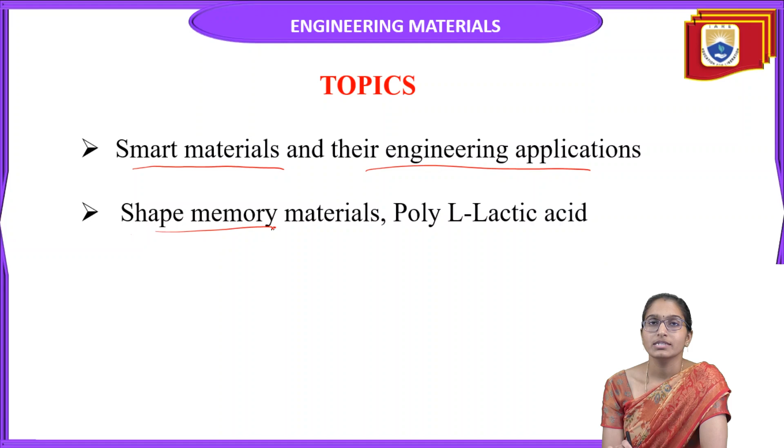Today I'm going to talk about the topic smart materials and their engineering applications. Coming to the topics, we will talk about smart materials and their engineering applications, and there are some other alloys called shape memory materials and poly L-lactic acid.

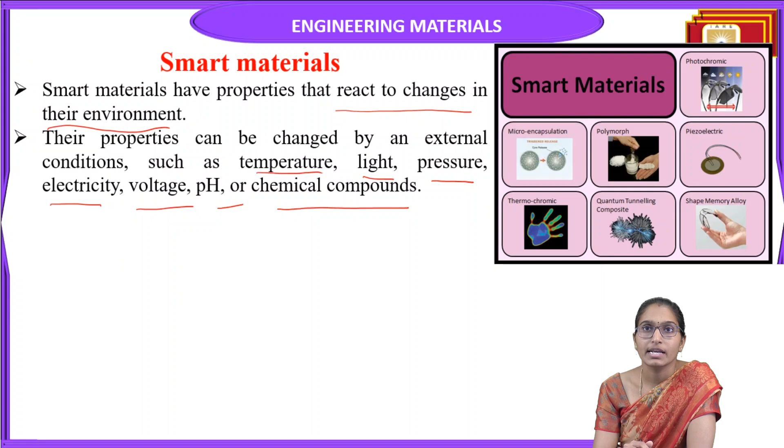Coming to the smart materials, what are smart materials? Smart materials have properties that react to the change in the environment. Their properties can be changed by external conditions such as temperature, light, pressure, electricity, voltage, pH, and chemical compounds. So then they can change their properties when they react to such conditions.

So these changes, why they are called smart materials, is because the changes whatever happens due to the external stimuli can be reversible. They can be changed and can be repeated many times. So this is the most advantage of smart materials, which cannot be carried out, meaning the changes cannot be reversible with other materials. Hence they are called smart materials.

These materials play a crucial role in various engineering applications and other fields. Here you can see different kinds of smart materials, like photochromic spectacles and foldable photo frames, piezoelectric bodies, and quantum tunneling composites.

And these are thermochromic materials that you have in X-ray, and this is micro encapsulation. That means you encapsulate the material that can be formed as a capsule and release some amount of the particle which you are loading inside them whenever they are needed. This can be used mainly for drug deliveries.

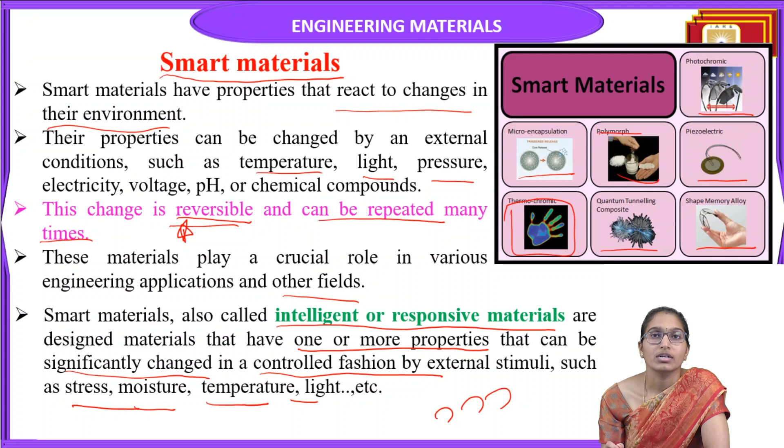The smart materials are also called intelligent or responsive materials. These are designed materials that have one or more properties that can be significantly changed in a controlled fashion by external stimuli such as stress, moisture, temperature, light. These can be tuned in a significant change in a controlled fashion, one after the other, based on the requirement. So based on that, one or the other properties can be adapted into the material, or we can have different ways of tuning the material so as to get the requirement.

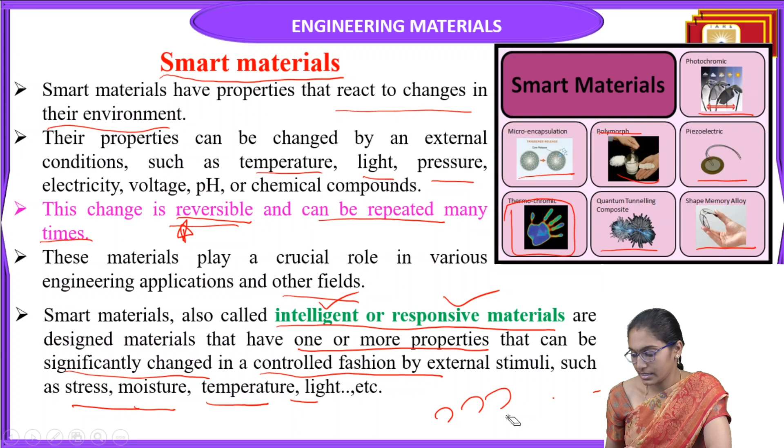Hence they are known as intelligent or responsive materials. So let us see what are the classifications of smart materials.

There are different types of materials known as smart materials, which are gaining high importance in the industry, so that they can be replaced by the regularly used metals or alloys or plastics or different types of metals, which can absolutely be replaced by these materials, and they can be very widely used.

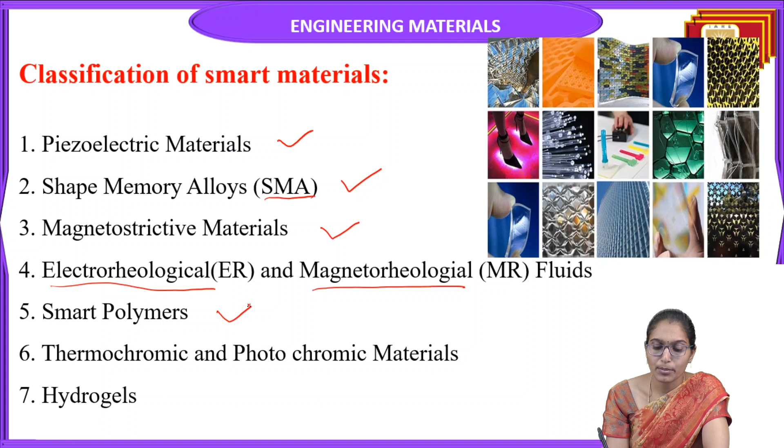One of the different types of smart materials is piezoelectric materials, shape memory alloys known as SMA. Next is magnetostrictive materials, then electrorheological and magnetorheological fluids, smart polymers, thermochromic and photochromic materials, and hydrogels. So these are seven types of classification of the materials.

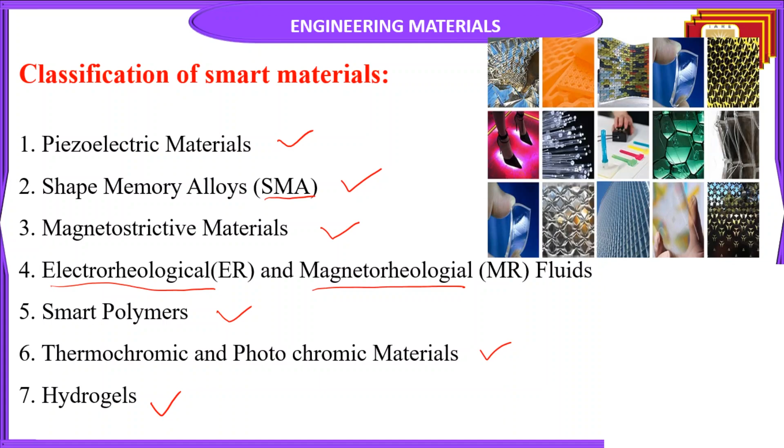Based on their properties, these are classified. Coming to the first type, that is the piezoelectric material. The word piezo means that which will produce electricity. So piezoelectrics are nothing but materials that can produce electrical energy upon application of mechanical stress.

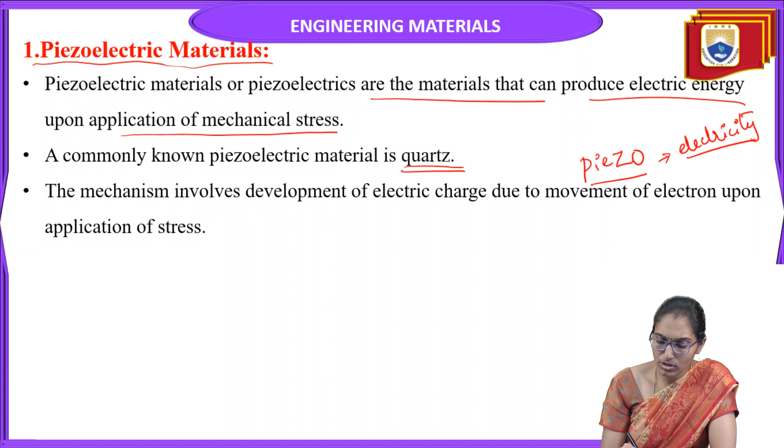The commonly known piezoelectric material is quartz. All of you know quartz very well, but it is a piezoelectric material. The mechanism of how this material acts involves the development of electrical charge due to the movement of the electron upon application of stress. Piezoelectricity was discovered in the 1880s by the Curie brothers in quartz crystals.

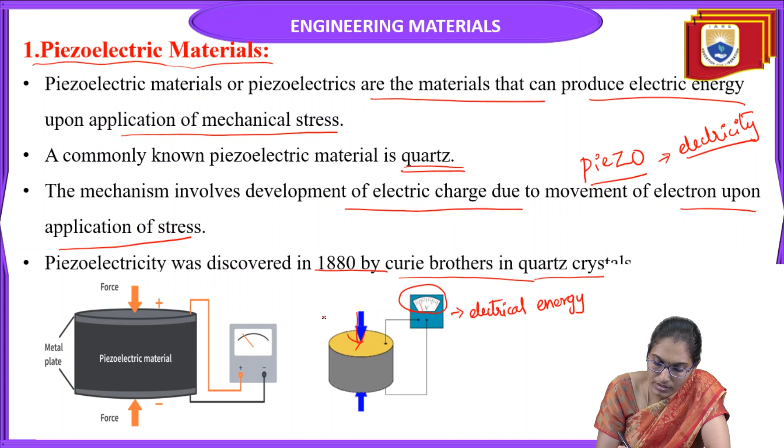Okay, this one is mechanical stress. And here you have another film picture. So the force is applied in this, in order to give the stress on the metal substrate, the metallic plate. This is a piezoelectric material which is producing electricity here.

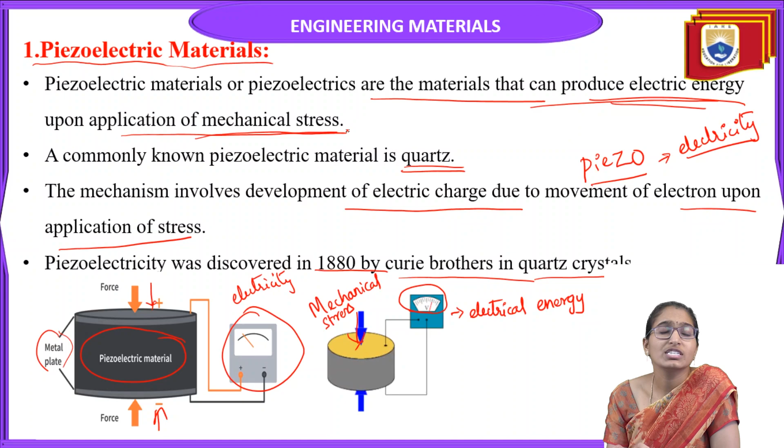And so this is the piezoelectric material. So piezoelectric material is nothing but the material that produces electrical energy upon application of mechanical stress. So do you know what is a real, generally used example of the piezoelectric material? Let us see what is that. So this is the piezoelectric material.

So when you apply stress here, what is happening? The piezoelectric element is attached here. It is a regularly used lighter. It has a piezoelectric element in this, and when you apply a stress over this, the electricity is generated because of the movement of the electrons from here to here, and the heat is generated here. You have the gas which is supplied from another tube.

So this is a very good example of the piezoelectric material that we quite often see in our daily life. So the mechanical shock is converted to electricity. So what is happening when you press? Mechanical stress is applied, it is taken by the piezoelectric material, the electrons are passed, the gas is supplied over this, and the heat is generated.

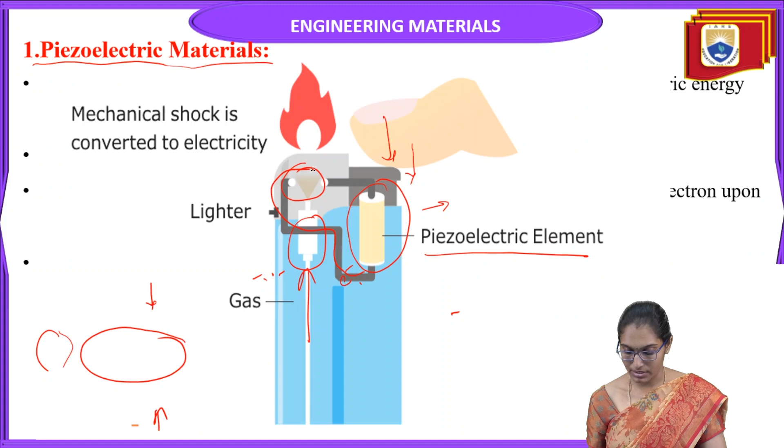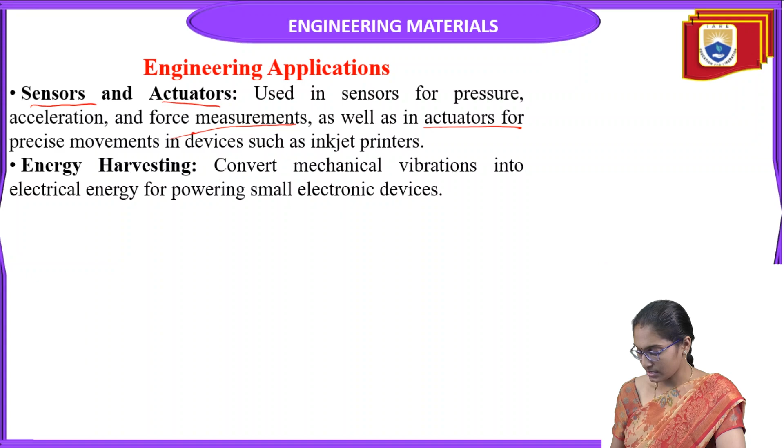So what are the engineering applications of these piezoelectric materials? They can be used in sensors and actuators. They are used in sensors for pressure, acceleration, and force measurements, as well as in actuators for precise movements in devices such as inkjet printers. So they are mainly used in inkjet printers and sensors.

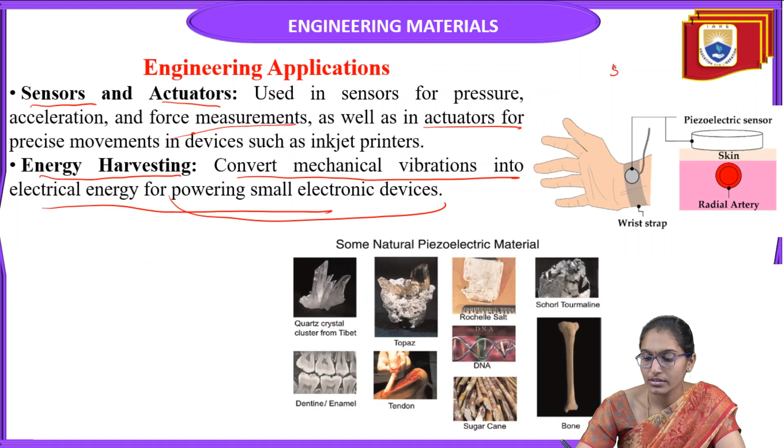And one is energy harvesting, which is to convert mechanical vibrations into electric energy and power small electronic devices. So the best example is the smart watches that we use, which have a piezoelectric material. In the smart watches, the wrist strap has the piezoelectric element in it.

So with the features that you have, you can get the blood pressure and heartbeat and walk count. So many things can be obtained. The piezoelectric material that is present in this sensor is directly in contact with the radial artery. So based on that, your heartbeat can be known from the smartwatch that you have on your hand.

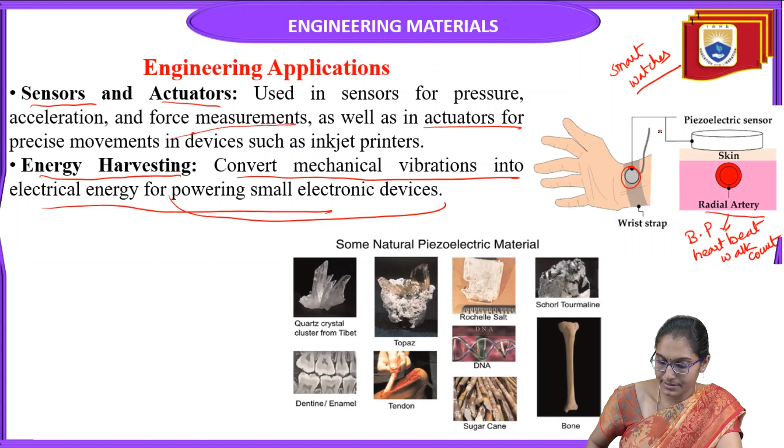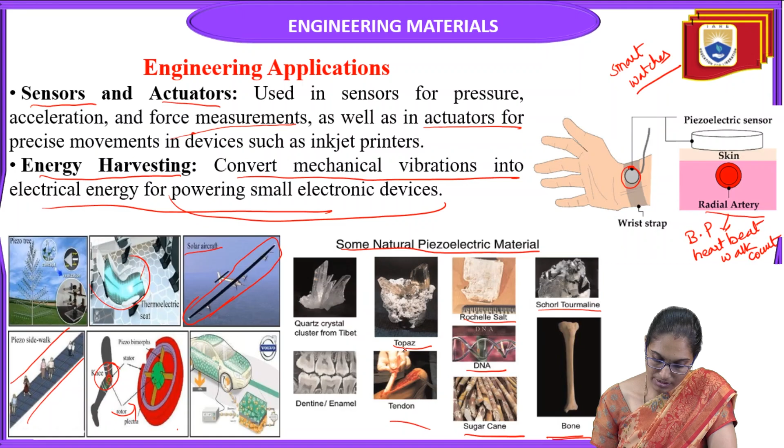And these are some natural piezoelectric materials that are present in nature itself. The main natural piezoelectric materials are bone and tourmaline, Rochelle salt, tendons and sugar cane. DNA and topaz are piezoelectric materials, and also dentine, enamel and quartz crystal. These are all obtained from nature and they have piezoelectric behavior.

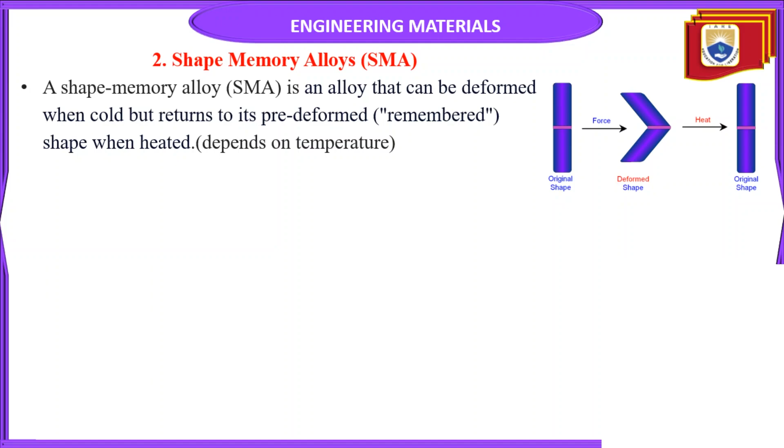Coming to the next type of smart materials, shape memory alloys or SMA. A shape memory alloy is an alloy that can be deformed when cold but returns to its pre-deformed, remembered condition when it is heated.

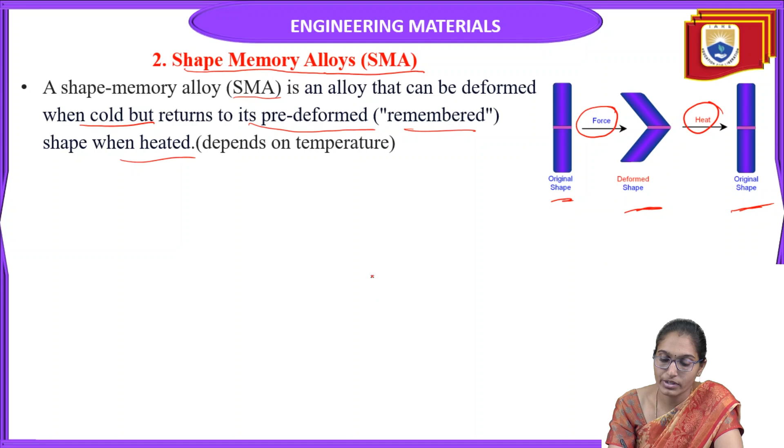So here it is nothing but, from the original shape, it can be deformed when you apply a force, and then if you heat it again, the original shape will come. So let us have two examples. If I take some plastic pipe, when force is applied, it can be deformed. But if you heat it, what will happen? It will melt. But there is no reformation.

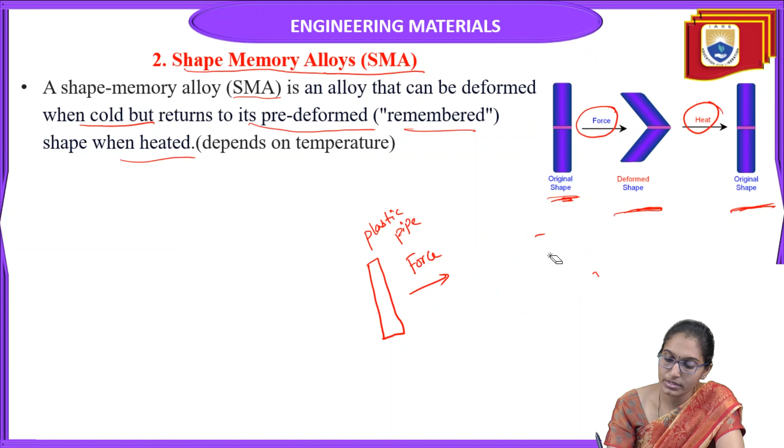Whereas the SMA alloys, when you apply some force, they will get deformed. But on application of heat, they can be reformed. The original shape is obtained. So this is the difference between the normal material what we have and the shape memory alloys.

So what are the applications of these shape memory alloys? They can be used in aerospace industries. They are used in deployable structures and adaptive wing components in aircraft applications, where the opening and closing of the wings of the aircraft can happen because of the wind forces. So there is a morphing device embedded within the wing. Because of that, it goes to a deformed stage when there is a high pressure wind.

And it comes to the original shape. So based on the wind pressures, it will change from original to the final stage, and from the final stage come back to the original stage. So the morphing device stretches, resulting in wing area increase, and in compression the area is decreased.

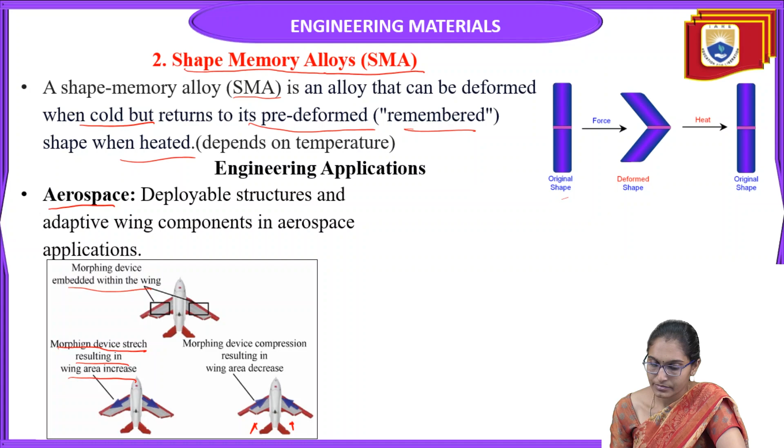Coming to the next application, shape memory alloys are used in biomedical devices. They are used in stents that can be compressed during insertion, then can expand due to their shape memory to the original shape within the body. So let us take one example, one stent. If you have some blockage, a heart block or something in your blood vessel, then you are putting in a stent.

This is a stent that you are keeping in order to open up the vessel, because here your blood vessel is blocked, so this has to be opened. When you are inserting it, it is small in size. When it is inserted, then it will increase its size. It will be deformed in order to increase the width. Then it will stay in its position so that the blood is flowing in the blood vessels. So here these shape memory alloys can be used.

And in dental applications, the dental clips are applied in order to get all the teeth in the same series or place; they can be dragged. So here shape memory alloys are applied. They are initially tightened in order to have the teeth come to their original position.

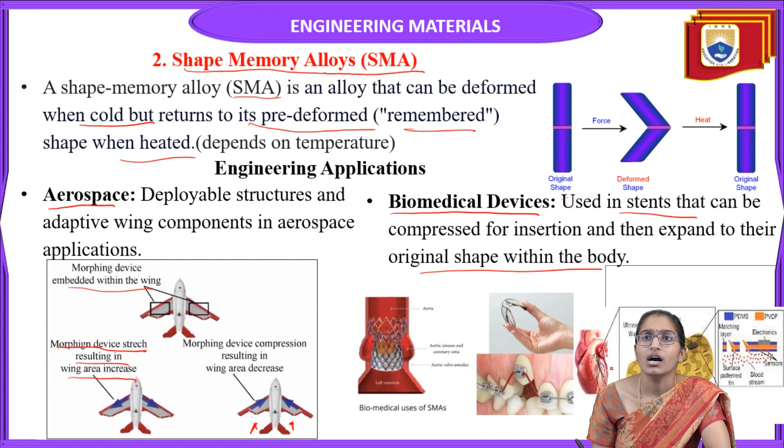So these are different applications present for SMA, shape memory alloys. They can be used in medicine, optometry, engines, aerospace, robotics, automotive, pipings, civil structures, water sprinklers, textiles. So here are a few examples. Medicine, robotics: in robotics, when something is held, then it will release, so it comes from the deformed structure to its original place. And artificial hands kind of things. Here aircraft applications, and sutures and clips.

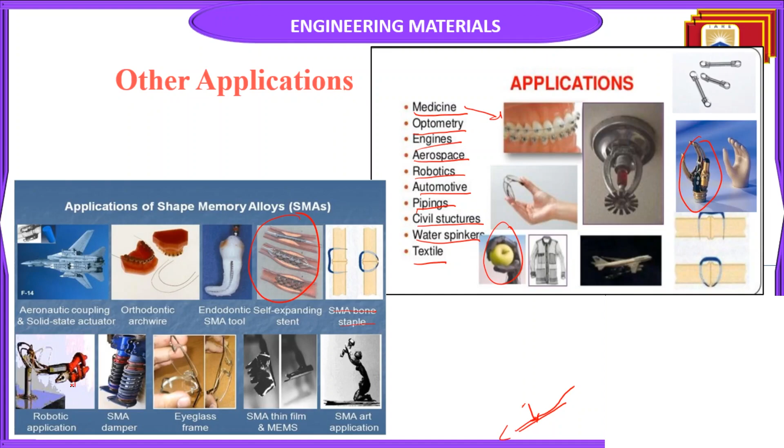Applications of shape memory alloys: you can see aeronautics, solid state actuators, and orthodontic archwire. And SMA bone staples, robotic applications, SMA dampers, eyeglass frames, SMA thin films and MEMS, and SMA art applications. So once you press here, it is deformed, but like a spring nature, it will come to its original position.

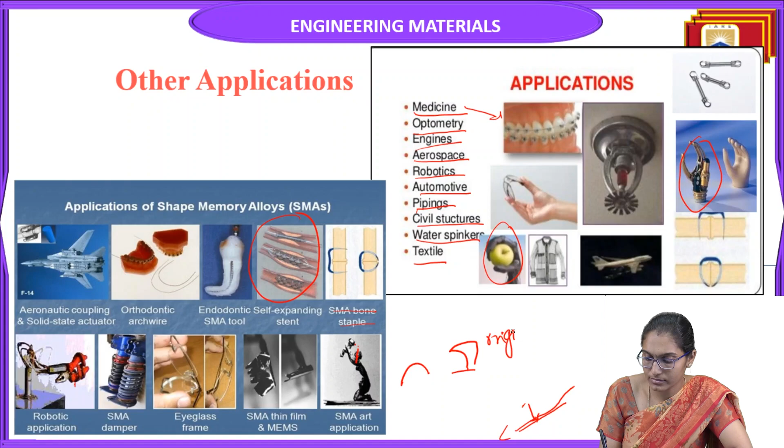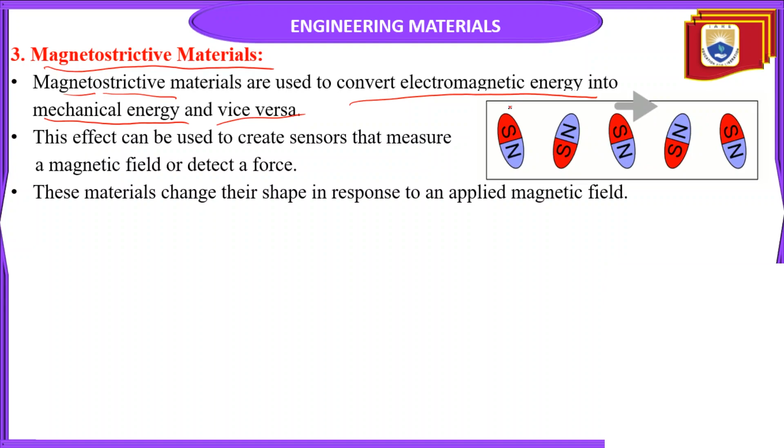So with these materials, when you apply a stress in one direction, all north phases come to one side, and when you apply a stress in the other direction, all south phases come. So these are magnetostrictive materials used to convert electromagnetic energy into mechanical energy. This effect can be used to create sensors that measure the magnetic field or detect the magnetic force. These materials change their shape in response to an applied magnetic field.

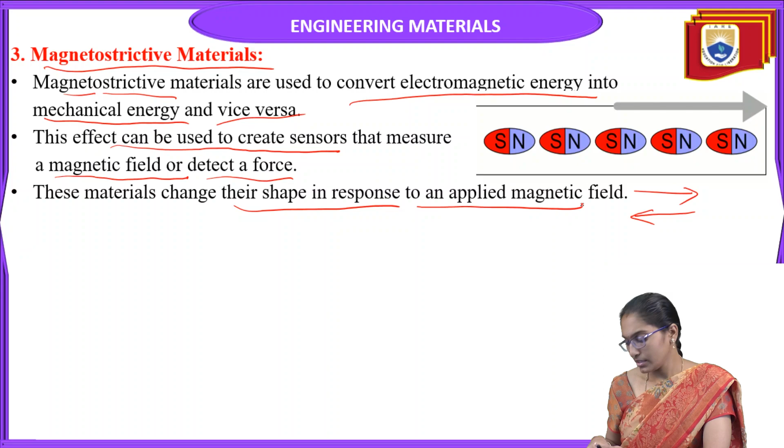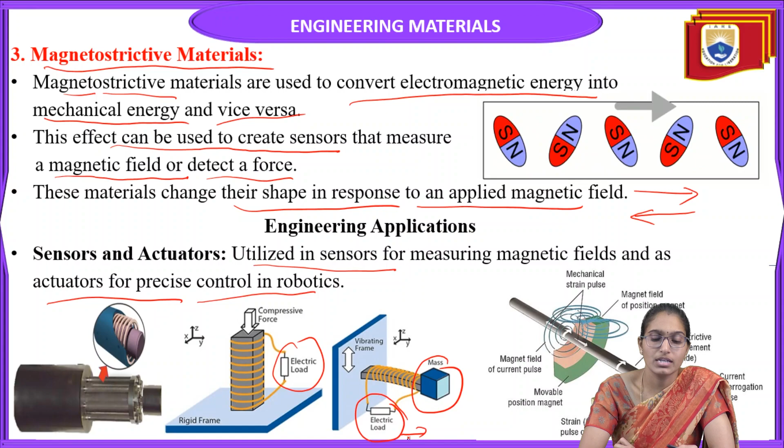So, what are the engineering applications of these magnetostrictive materials? They are utilized in sensors for measuring magnetic fields and as actuators for precise control in robotics. So you can see here, this is a rigid frame. When load is applied, electrical energy is generated. In the vibrating part, here is a mass that is applied and electrical energy is generated. It is used in sensors for measuring the magnetic field and as actuators for precise control in robotics.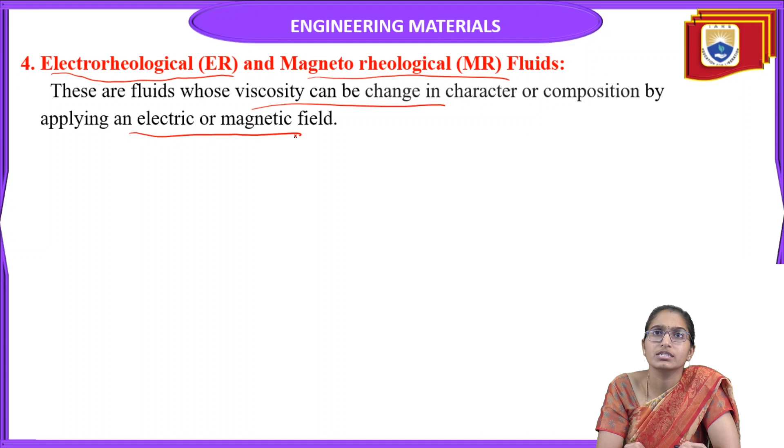Coming to the next type, electro-rheological or magneto-rheological fluids. These are fluids whose viscosity can be changed in character or composition by application of electrical energy or a magnetic field. So what are the applications of these fluids? They are mainly used in dampers and shock absorbers. They are present in automotive and industrial applications to adjust the suspension characteristics based on changing conditions.

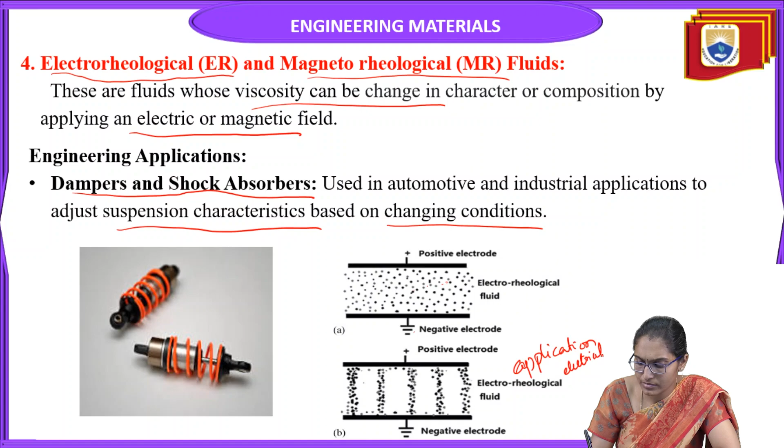Coming to the next type, smart polymers. So what are these smart polymers? Smart polymers are polymers that undergo reversible changes in their properties in response to external stimuli. They show a significant change in structure and properties that can be induced by a very small stimulus, which makes them unique and effective. These polymers are different from the polymers available in the market because they have significant factors that can be tuned by applying a small stimulus, changed one by one, giving multiple properties in one polymer itself. So these smart polymers are highly appreciable and widely used in different fields.

So let us see the applications of these smart polymers. They are used for sensors, actuators such as artificial muscles, production of hydrogels, and biodegradable packaging. They are also used in biomedical devices as drug delivery systems and responsive coatings for medical implants, and in textiles as responsive fabrics for moisture management and color-changing textiles. So these are the different applications obtained by using smart polymers.

So let us see the applications of these smart polymers. They can be used in artificial muscles, sensors and actuators, separation and purification methods, and shape-changing fibers. We can develop microfluidic devices, use them as viscosity modifiers, and they can be used for controlled release and as self-healing materials.

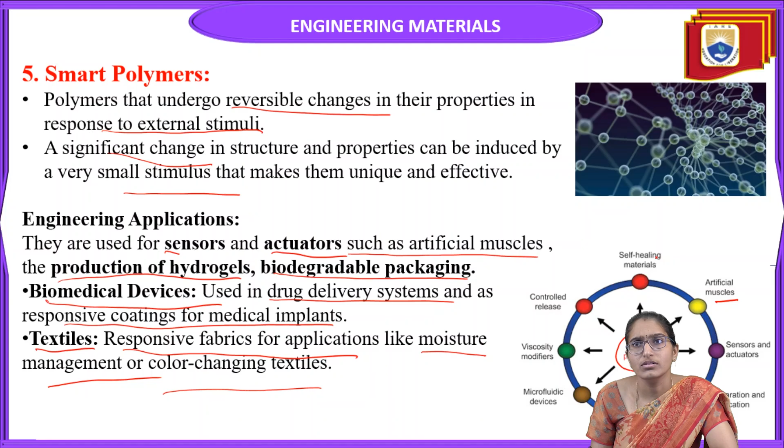So let us come to the next topic, which is thermochromic or photochromic materials. This is a very interesting topic, the photochromic material. What is a photochromic material?

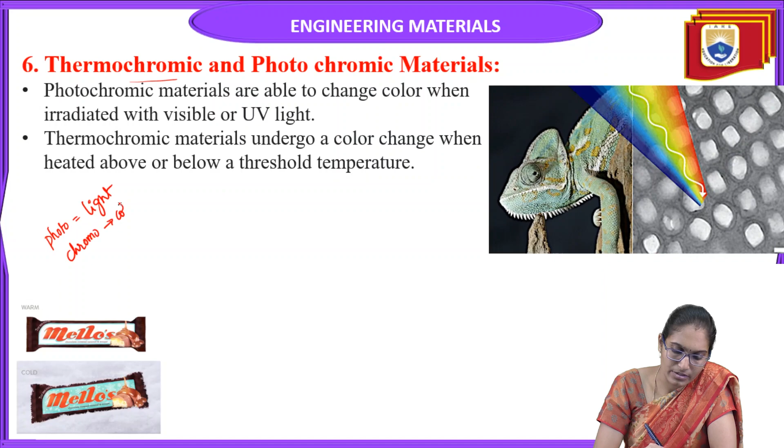Photo means what? Light. Chromic means color. So photochromic materials are the materials which can change their color when irradiated with visible or UV light. So when light is radiated on the materials, they can change color. So these are called photochromic materials.

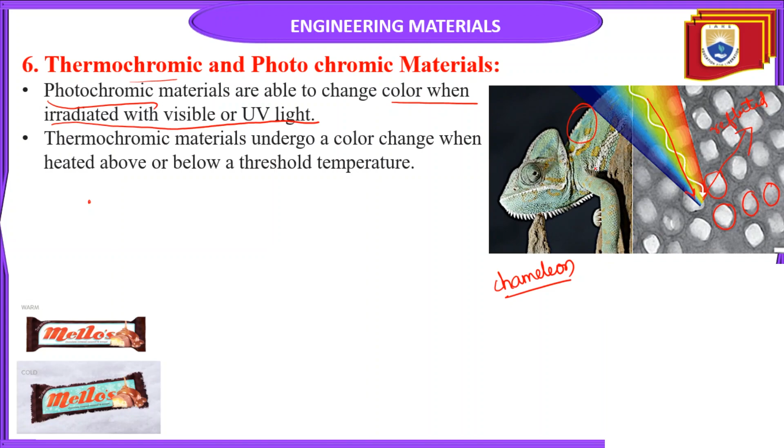So here you can see a very good example of a photochromic material. This is the chameleon. So what happens? These are the nanoparticles present on the surface of the body of the chameleon. So when light is irradiated on the surface of the nanoparticles present on the chameleon, a particular wavelength of the light is reflected out, which is the reason for the different colors present in the chameleon.

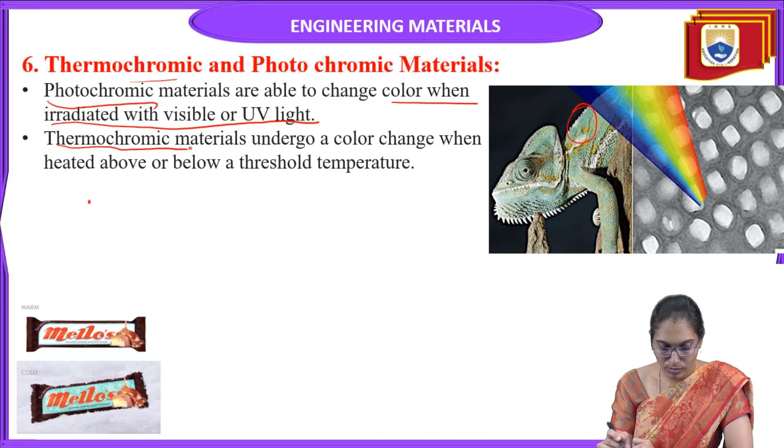There is a change in the color with respect to the light that is reflected out. So there is a change of colors for the chameleon based on the environment. So next, coming to thermochromic materials. What are thermochromic materials? Thermo means heat. Chromic means again the same, color.

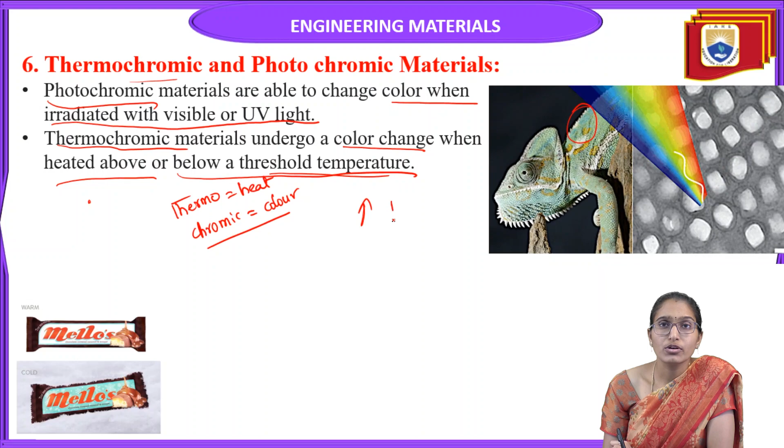So, what are thermochromic materials? Thermochromic materials are nothing but materials that have a change in color when they are heated above or below the threshold temperature. Some material has a stable temperature, which is nothing but the threshold temperature. So if it is heated above or below its threshold temperature, it gives a change in color. So they are named thermochromic materials.

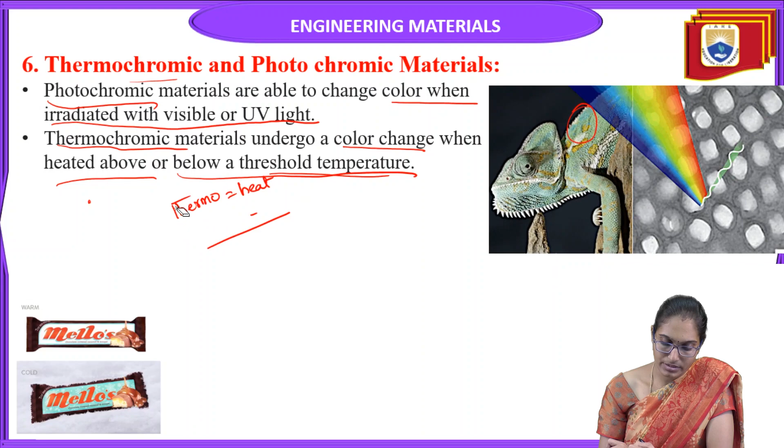These are smart windows. They adjust automatically and tint based on the sunlight intensity. And these materials can be used in packaging also, as indicators of temperature. This is one example of the chocolate. You can see when it is warm the color of the chocolate is white, and when it is cold it is blue in color. So without opening it, you can observe whether it is cold or warm.

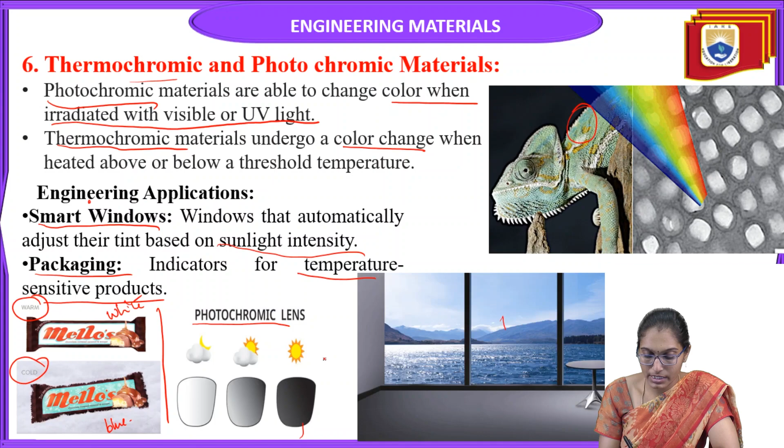Coming to photochromic lenses, another application of photochromic materials: you can see here when there is cloud or less sunlight, the glass is transparent, and when there is heat, it becomes a kind of shield, becoming dark in order to stop direct sunlight from focusing onto your eyes. So these are photochromic lenses, which are already in use in the market.

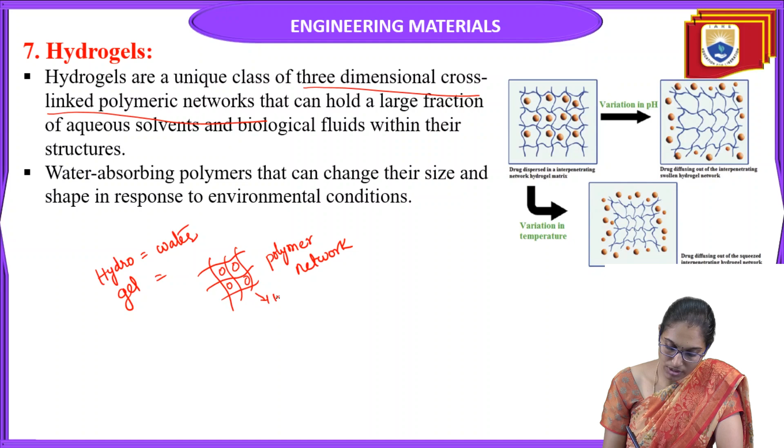Then coming to hydrogels. What are hydrogels? By name itself, hydro means water. Gel is nothing but a three-dimensional cross-linked polymer network. So hydrogels are nothing but cross-linked three-dimensional polymeric networks that have water in them. When the cross-links of the gels are filled with water, they are known as hydrogels.

They are also considered smart materials. Let us see how and why. You can see here one example of hydrogels. Instead of water, they have loaded some drugs into the cross-linked spaces of the hydrogels. So when there is a variation in the pH, at a particular pH the drug molecules are released out, and also when there is a variation in temperature. So they can be pH dependent and temperature dependent. See here also the drug molecules are out. So this example itself clearly shows this can be used in the drug industry.

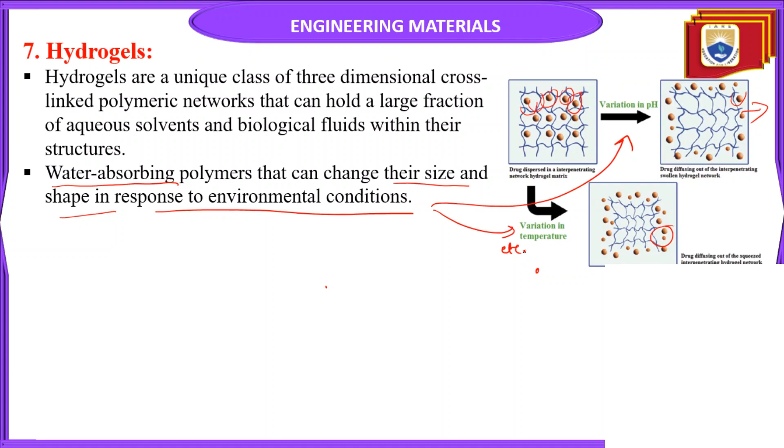Okay. So these are nothing but water absorbing polymers because they are hydrogels that can change their size and shape in response to environmental conditions such as temperature, pH, etc. So based on the factor, they can have a change in the structure or shape. So based on that, we can use them in different fields. So let us see what are the engineering applications that hydrogels can be used in.

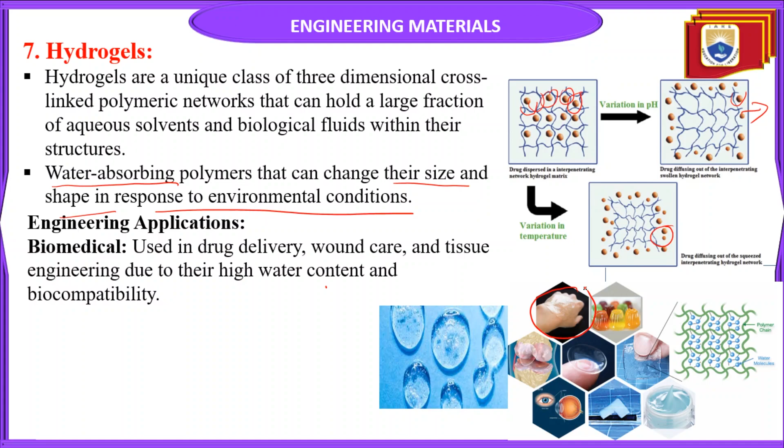So the most common example is the gels, the moisture creams or the gels that we use in summer. So you can see here they will protect your skin because the gels are loaded with water and some UV protecting particles which are loaded into the hydrogels, and they are applied on the skin.

And the water balls you might have seen everywhere outside. So these balls, when they absorb some water, when they are put in the water, they get enlarged. They put some colors in the balls and put them in water. So what will happen? They will give some aesthetic appearance because of the color in them, and by absorbing water, they will form enlarged balls, so they can be used for decoration purposes also.

And the most common hydrogel use is in tissue paper that we use in our daily life. So the paper looks very soft because it has hydrogel particles in it. So when water is in contact with the tissue paper, it gets absorbed, and the tissue paper gets wetted and it will be very soft. So this is one of the daily use examples of hydrogels.

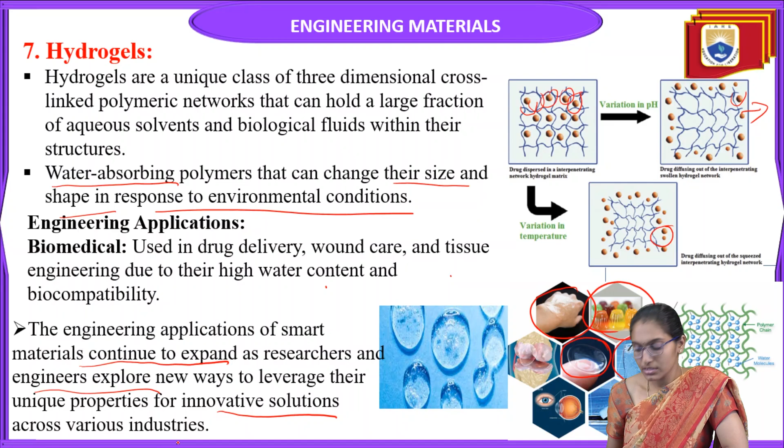So coming to the next example of smart materials is polylactic acid, which is shortly known as PLLA. So polylactic acid is chosen as a polymer with shape memory-like properties. Why it is chosen is because of its biodegradable and bioactive nature. It is a thermoplastic made from renewable sources such as starch and sugarcane.

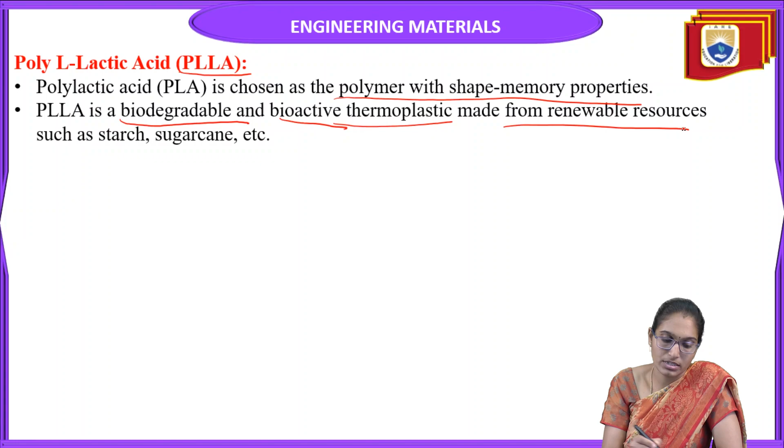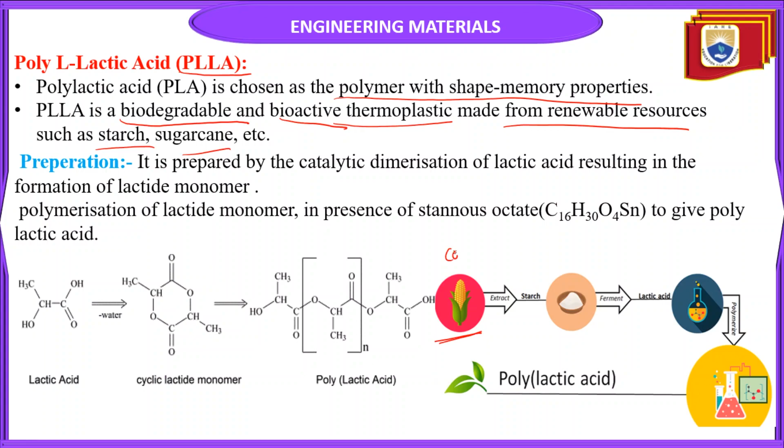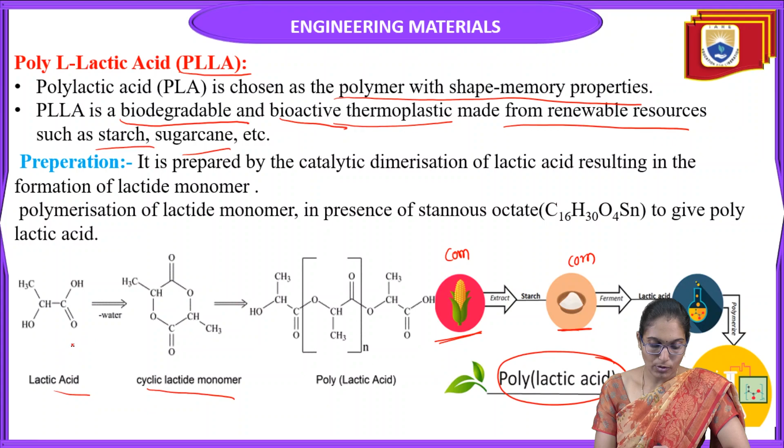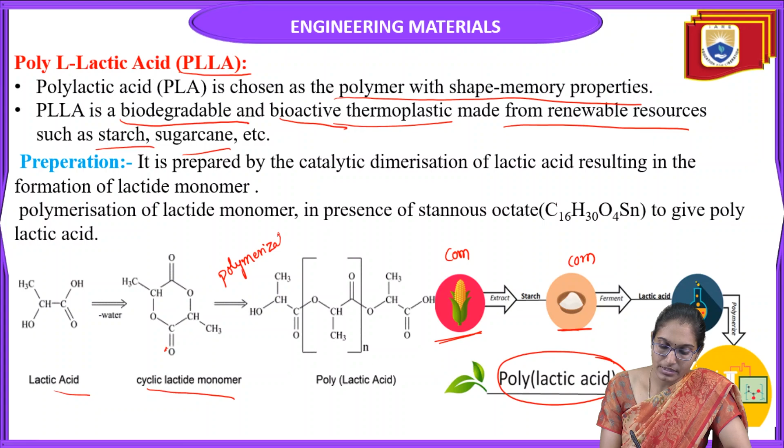So let us see how it is prepared. So this is the source. It is taken from corn. So corn starch is taken. This is starch obtained from corn, and it is treated with lactic acid and polymerized in order to produce polylactic acid. So this is the structure of polylactic acid. If you want to prepare it industrially, lactic acid forms the cyclic lactide monomer, and then polymerization of the lactide will occur in order to give polylactic acid. This is the polylactic acid.

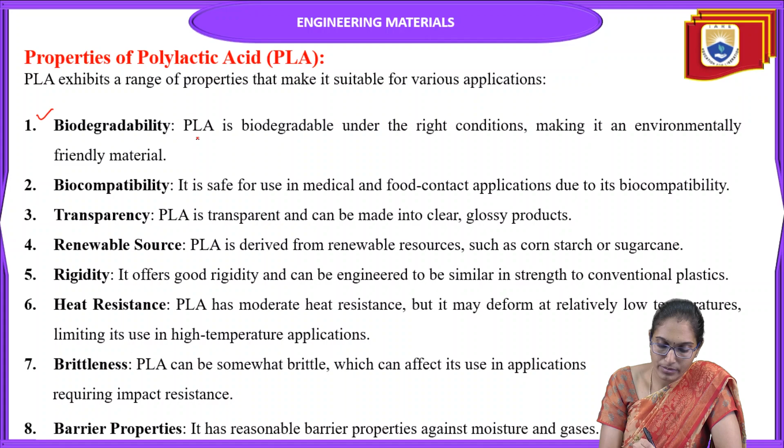So what are the properties of this polylactic acid? Polylactic acid exhibits a wide range of properties that make it suitable for various applications. It is biodegradable. Why? Because it is obtained from corn starch, so it is biodegradable, making it environment friendly, and it is biocompatible too. It is safe for use in industries like medicine and food contact applications due to its biocompatible nature. The next one is its transparency. It is very transparent in nature and can be made into clear and glossy products.

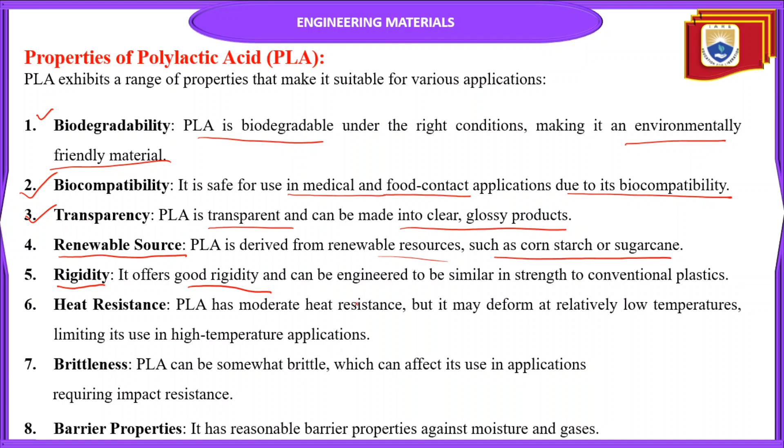The next one is it is from a renewable source. PLLA comes from a renewable source, nothing but corn, starch and sugarcane. So hence it is a renewable source. And it is very rigid. It has a rigidity property. It offers good rigidity and can be engineered to similar strength as conventional plastics. So it can be a replacement for conventional plastics, and it is a transparent and very good material, and it is heat resistant too. It has another property, which is heat resistance.

PLA has a moderate heat resistance but may deform at relatively low temperatures, limiting its use at high temperatures. It cannot be used for high temperatures, but moderately it is a very well smart material.

PLA also has brittleness. It can be somewhat brittle, which can affect its use in applications requiring impact resistance.

It also has barrier properties, having reasonable barrier properties against moisture and gases, so it can be used as a barrier material.

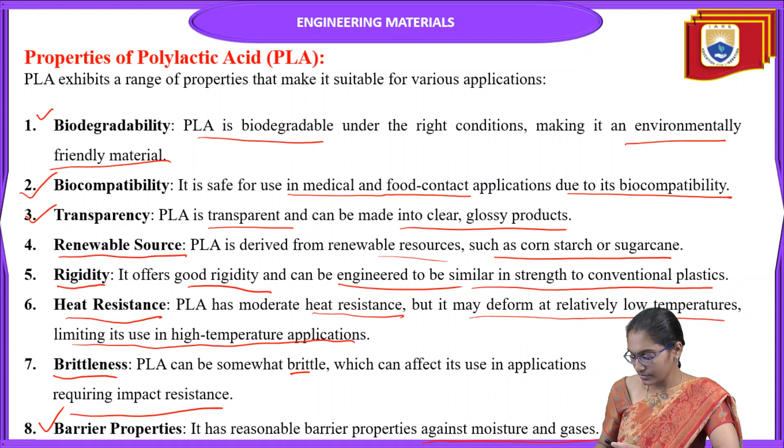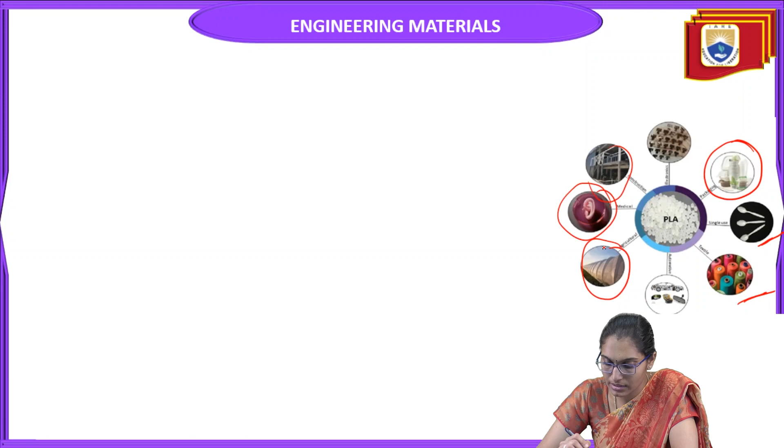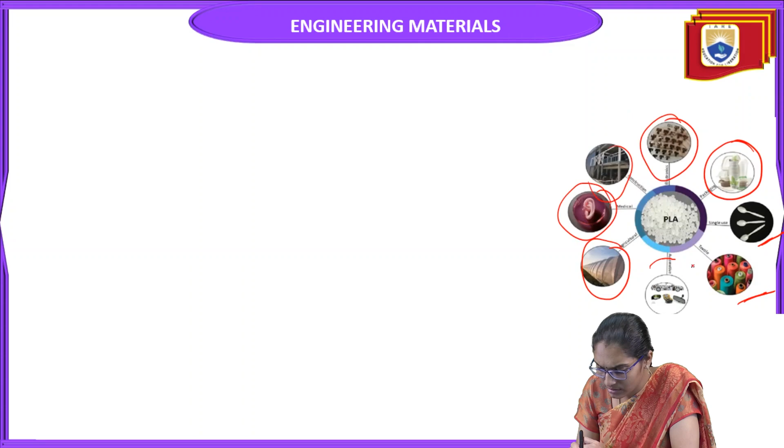These are applications of polylactic acid: in the textile industry for making threads, and in transparent spoons used in food, in packages, textiles, construction, medical purposes, agricultural purposes, and printing. There are different applications everywhere.

So what are the uses of polylactic acid? These are nothing but applications. Till now we have studied the characteristics it has, but now what are the applications where they can be used?

One is in packaging, for producing biodegradable and compostable packaging materials such as disposable cups, food containers, and films.

In the food industry we can use this PLA, and in the textile industry this PLA fiber, when made as a fiber, can be used to produce biodegradable and sustainable fabrics, because other fabrics used may not be degradable. If you use them for a very long time, their degradation is a difficult factor. So PLA can be a good replacement in fabric or textile industry, as it is biodegradable.

PLA can also be used in medical and healthcare. It is used in medical devices such as sutures, tissue engineering scaffolds, and drug delivery systems due to its biocompatibility. This is accepted by the human body, and there is no toxic or adverse effect of PLA if it is sent inside the body or consumed by the human being. Hence it can be explored in medical and healthcare applications also.

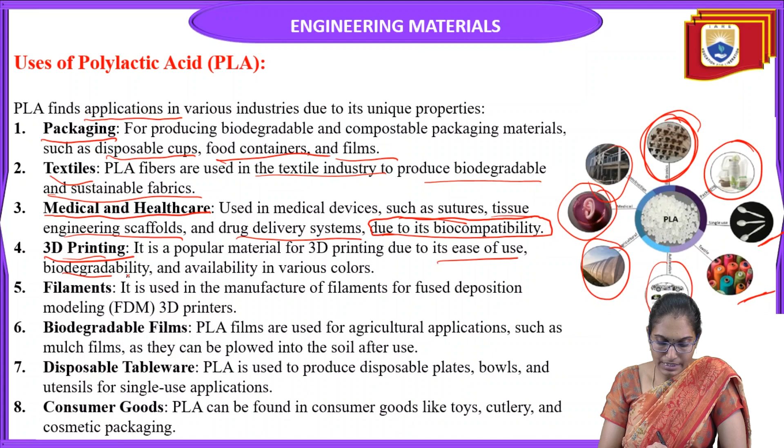The next one is 3D printing. Here you can see this is 3D printing. It's a popular material for 3D printing due to its ease of use, biodegradability, and availability in various colors, because of which it can be used in 3D printing also.

It can also be used in filaments. It is used in the manufacture of filaments for fused deposition modeling, FDM, in 3D printers. So in 3D printers also it can be used as a filament.

It can also be used as biodegradable films. PLA films are used for agricultural applications such as mulch films, and they can be plowed into the soil after use, so they get degraded after their usage.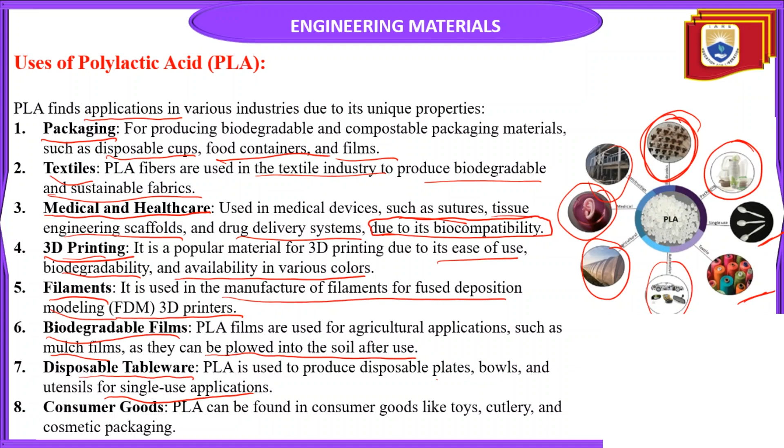They can be used as disposable tableware also. PLA produces disposable plates, bowls, and utensils for single use. Once used you can throw it - it is degradable, so they can be used as use-and-throw plates, bowls, etc., as disposable materials.

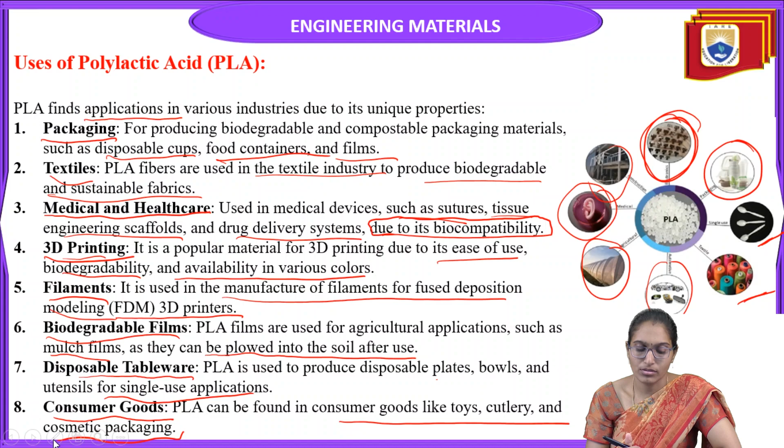And where else can they be used? As consumer goods also it can be used. It is found in consumer goods like toys, cutlery, and cosmetic packaging. So this can be one of the applications as consumer goods, packaging, making toys, and packaging cosmetic materials.